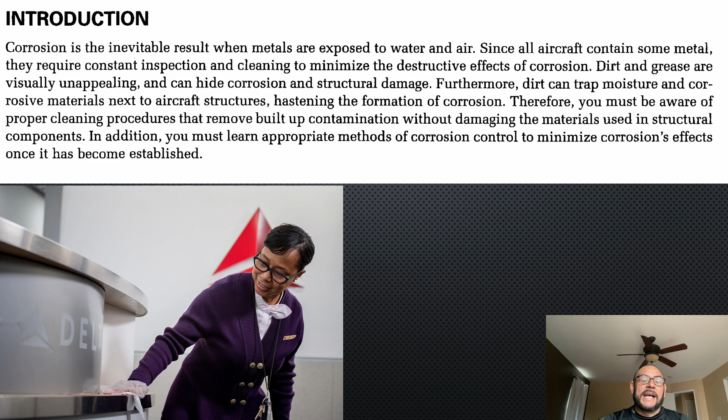Now, while a clean aircraft is more visually appealing than a dirty one, appearance is a secondary consideration in aircraft cleaning. That is all to say that we clean aircraft not to make them look beautiful, although customers like a clean, beautiful plane. But as AMPs, we clean them so we can visually inspect for corrosion or any destructive measures or stress fractures that the aircraft has endured or survived.

When we look at Appendix D of the FAR, Part 43 requires that the airframe and engine be cleaned before performing an annual or 100-hour inspection. In addition, common sense and good maintenance practice require that an aircraft be kept clean. Dirt can cover up cracks and damaged components, as well as trap moisture and solvents that lead to corrosion. If allowed to accumulate over time, dirt and debris can build up to a considerable weight and decrease the useful load of the aircraft. Therefore, the cleaning of the aircraft exterior and interior should not be taken lightly.

The materials and procedures presented in this section are intended as guidelines only. You should always follow the manufacturer's recommendation for cleaners, solvents, and cleaning procedures.

Now, when we talk about weight, that is one of the biggest enemies of flight, right? Because the more weight you are transporting or carrying, the harder the engines have to work. So when you have buildup of dirt and grease all over the aircraft, that starts adding pounds to the weight of the aircraft, which means that you will be able to carry less. And in aviation, that is precious.

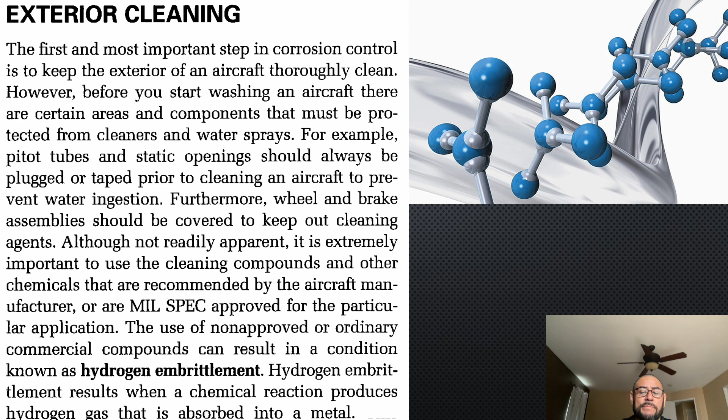Furthermore, wheel and brake assemblies should be covered to keep out cleaning agents. Although not readily apparent, it is extremely important that what is recommended by the aircraft manufacturer or the mil spec approved for a particular application be used. The use of non-approved or ordinary commercial compounds or chemicals can result in a condition known as hydrogen embrittlement. Hydrogen embrittlement results from chemical reactions that produce hydrogen gas that is absorbed into the metal, destroying the metal and its integrity.

Now also, the engine cowling and wheel well are usually full of grease and oil deposits that require special treatment and observation. So those are the areas where you need to really be careful, okay? Because as the landing gear goes up and down, there's hydraulic fluid, there's all kinds of stuff, there's debris, there's grass, there's dirt, there's all kinds of stuff being built up on the landing gear.

Typically, these areas must be soaked with a 1-to-2 mixture, that's the ratio of emulsion cleaner and water. After allowing the cleaner to remain on the surface for a few minutes, scrub the heavily soiled area with a soft bristle brush to completely loosen the dirt, and rinse it with a high-pressure stream of water.

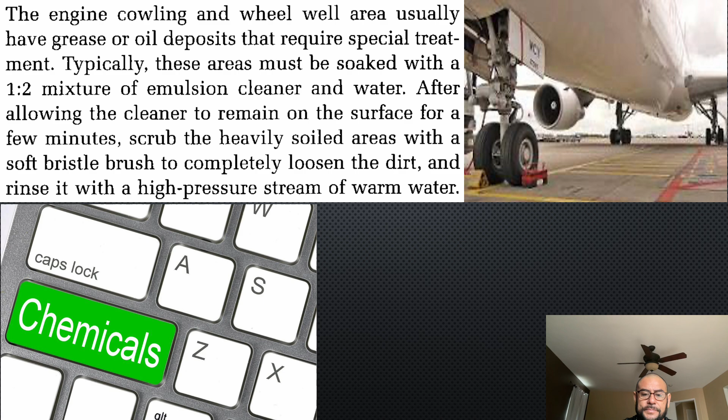Now, when we talk about the type of materials to be used in cleaning, it depends on the nature of the element that needs to be removed. For example, for removing grease, oil, or soft preservative compounds, dry cleaning solvents like naphtha are often used. The two most common types of naphtha are aliphatic naphtha and aromatic naphtha. Aliphatic naphtha is a hydrocarbon solvent that dissolves oil and grease but does not harm rubber or acrylic components.

That is huge, right? Because if you're applying chemicals that will destroy plastic or rubber, you might damage certain areas, certain lines, certain hydraulic fluid lines, right? The aromatic naphtha, on the other hand, attacks rubber or acrylic compounds or materials. Because it is safe on most materials, aliphatic naphtha is frequently used to wipe down clean surfaces before painting.

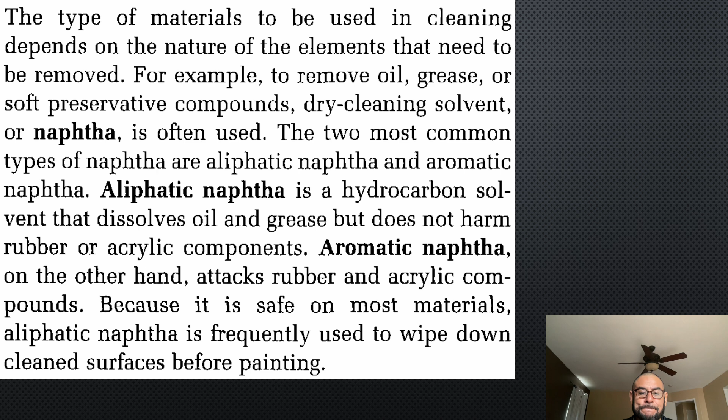Chemical cleaners must be used with great care in cleaning assembled aircraft. The danger of entrapping a potentially corrosive solvent in faying surfaces and crevices counteracts any advantages in their speed or effectiveness. For example, caustic cleaners can cause corrosion on aluminum or magnesium alloys and therefore should not be used. Magnesium engine parts should be washed with a commercial solvent and decarbonized, then scraped or grit blasted. Before they are painted, magnesium engine parts should be wiped down with a dichromate solution to improve paint adhesion.

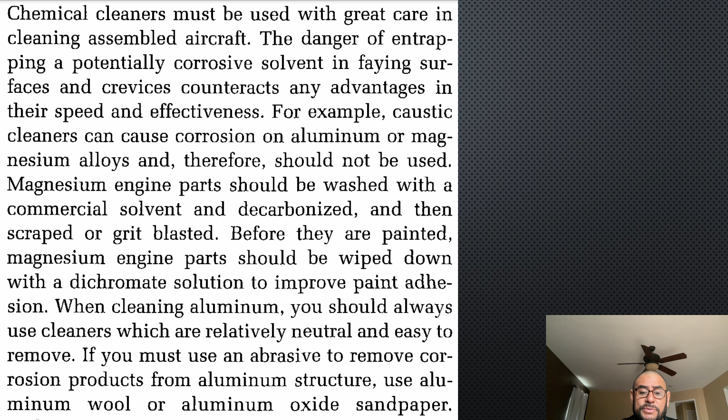When cleaning aluminum, you should always use cleaners which are relatively neutral and easy to remove. If you must use an abrasive to remove corrosive or corrosion products from aluminum structures, use aluminum wool or aluminum oxide sandpaper.

Now, let's look at using chemical cleaning agents. First and foremost, open all circuit breakers associated with battery power prior to application of flammable solvent, because you're going to be powering down the aircraft. If you can't get into a compartment because it's electrically operated, the door or compartment, then you won't be able to open it once you completely shut down the power or disconnect the battery.

Do not use synthetic wiping cloths with flammable agents. Wiping cloth made of natural materials such as cotton should be used. Be careful with alcohol. I've seen some mechanics even use jet fuel sometimes to wipe down certain difficult areas. Although jet fuel can really break down dirt and help expedite the cleaning process, it's also very flammable, so you don't want to use any type of avgas or jet fuel or fuel at all.

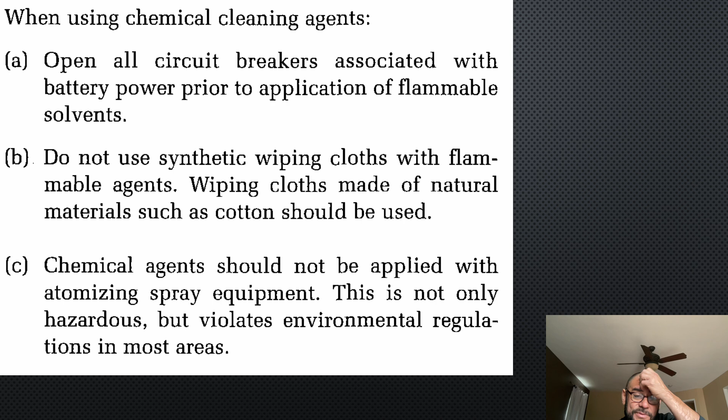Do not use synthetic wiping cloths. Chemical agents should not be applied with atomizing spray equipment. This is not only hazardous, but violates environmental regulations in most areas. Remember, as an A&P, you might be traveling to different countries, states, or parts of the world, where rules and standards might be different, so you have to be familiar with local policies, standards, and laws.

Keep all agents away from open flames, any live electrical circuits, or potential sources of electrical arcing. Very important. Also ensure that residual agents are removed from the aircraft, engine bays, and equipment. Do not mix any cleaning agent with any solvent. Do not use cleaning compounds at higher concentrations than recommended. Do not allow cleaning agents to dry on aircraft surfaces. You got to wipe them down quickly. Such practices can cause streaking and damage to aircraft finishes and components.

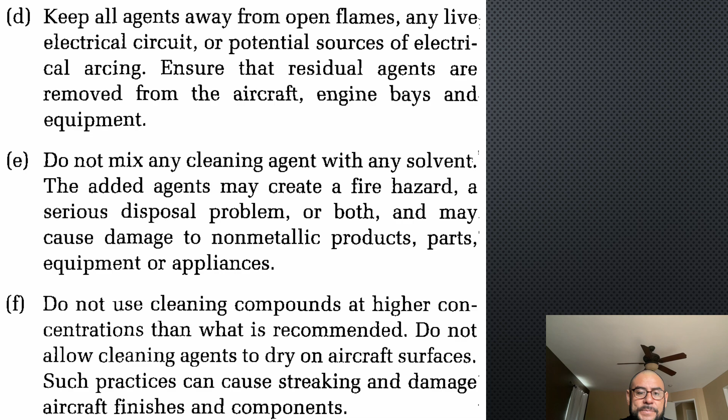To prevent entrapment of water and cleaning agents inside an aircraft part in structural areas, all drain holes, flap valves, etc. should be open before washing to ensure proper drainage occurs, and you're not holding water in certain areas, which can really create corrosion.

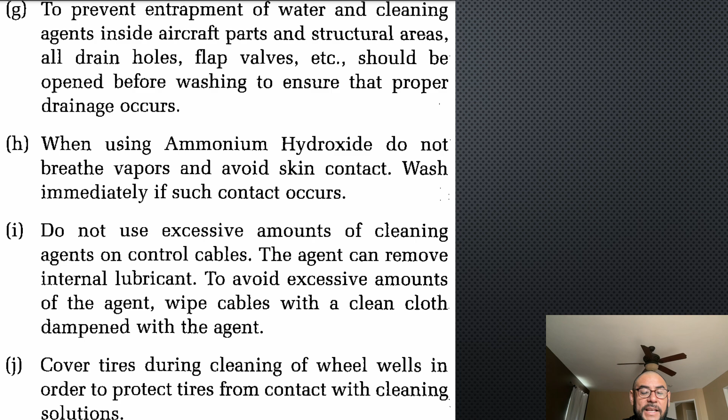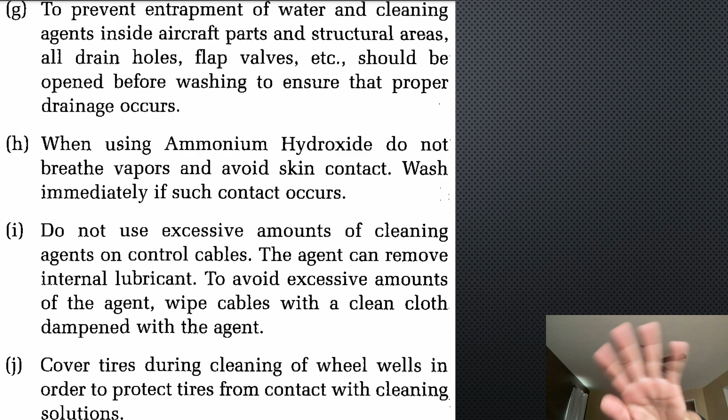When using ammonium hydroxide, do not breathe vapors, avoid skin contact, wash immediately if such contact occurs. Do not use excessive amounts of cleaning agents on control cables. The agents can remove internal lubricant. To avoid excessive amounts of agents, wipe cable with a clean cloth dampened with the agent. So you spray on the cloth and then you use the cloth. Do not spray directly onto the part and then wipe. Here's your clean cloth - you spray it on the cloth, then you get the cloth and wipe the part.

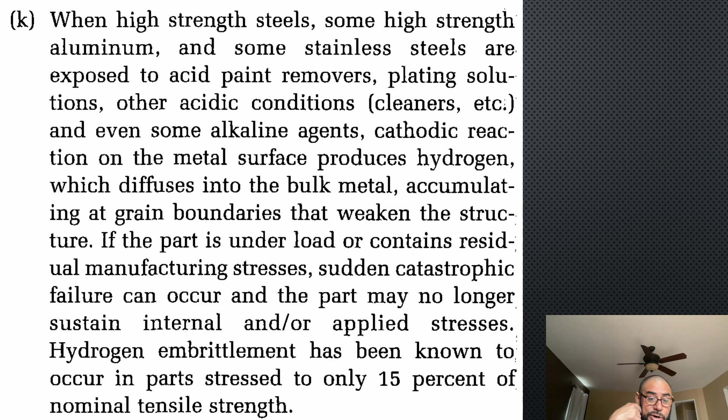Now, when high strength steels, some high strength aluminum, and some stainless steel are exposed to acid paint removers, plating solutions, or other acidic condition cleaners, or even some alkaline agents, some of this stuff can really damage the aircraft. You have to be able to read what the chemical agent is used for. If the part is under load or contains residual manufacturing stress, sudden catastrophic failure can occur and the part may no longer sustain internal and/or applied stresses. Hydrogen embrittlement has been known to occur in parts stressed to only 15% of the nominal tensile strength.

Now, when using high pressure water spray, you must exercise caution for those around you, especially around engine components. For example, if high pressure water is used to degrease an engine, you must avoid spraying electrical components such as the magnetos and wiring harnesses. Furthermore, high pressure water sprays can rinse the lubricant from bearings and grease fittings. Therefore, after washing wheel wells, flap tracks, and hinges, you should lubricate them to force out any water to prevent corrosion.

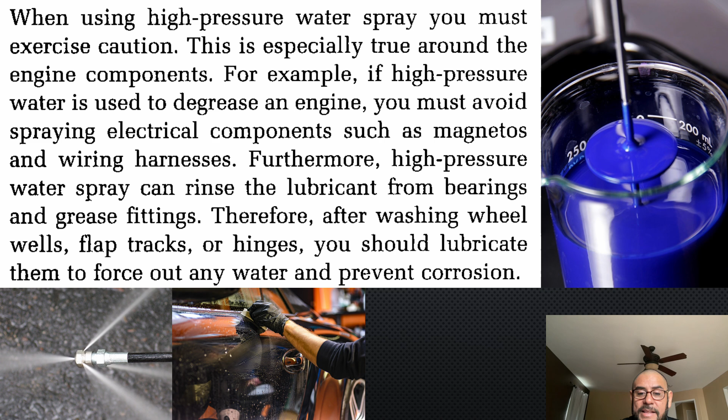Also, when you are using a high pressure spray, you might want to be careful with other aircraft around you, because that spray, especially if they're not inside the hangar, if there's a breeze, that water can travel to the next aircraft. So you have to be very careful.

Now, exterior finish maintenance. A clean, polished surface denies corrosion a place to start. Therefore, aircraft should be kept clean and waxed. All drain openings must be kept open, and deposits which have formed from engine exhaust must be removed before they build up excessively. Avoid damage to an aircraft by not using harmful cleaning, polishing, brightening, or paint removing materials.

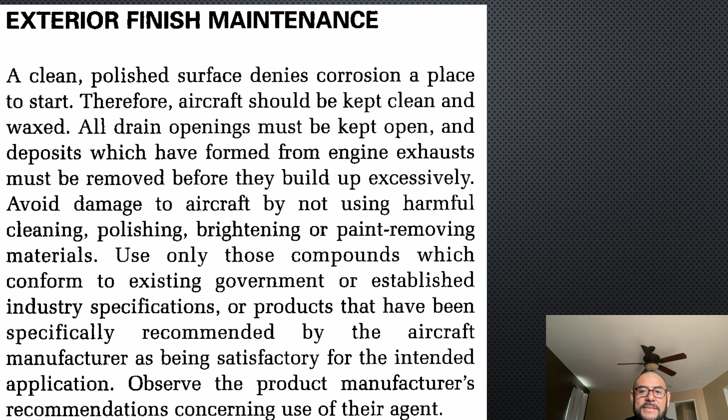Use only those compounds which conform to existing government or established industry specifications, or products that have been specially recommended for the aircraft or by the aircraft manufacturer as being satisfactory for the intent of the application. Observe the product manufacturer's recommendations concerning the use of their agents. Again, please read - you're a college student, please read.

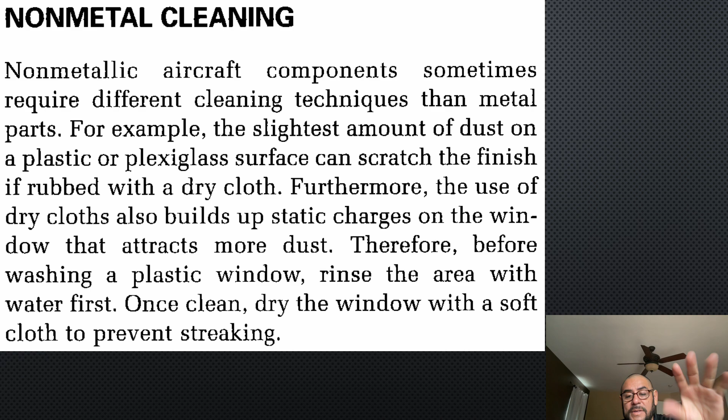Non-metallic aircraft components sometimes require different cleaning techniques than metal. For example, the slightest amount of dust on a plastic or plexiglass surface can scratch the finish if rubbed with a dry cloth. Furthermore, the use of dry cloths also builds up a static charge on the window that attracts more dust. Therefore, before washing a plastic window, rinse the area with water first. Once clean, dry the window with a soft cloth. So rinse it with water first, then clean it, then go with the dry cloth and remove everything, okay?

Oil and hydraulic fluid rapidly destroy the rubber in aircraft tires. Therefore, whenever these fluids are spilled on a tire, they should be immediately wiped off with a dry towel. The tires should be washed with soap and water. Because most cleaning solvents are petroleum based, soap and water are the only approved solutions for cleaning tires. Soap and water, okay, soap and water. That's your best friend right there.

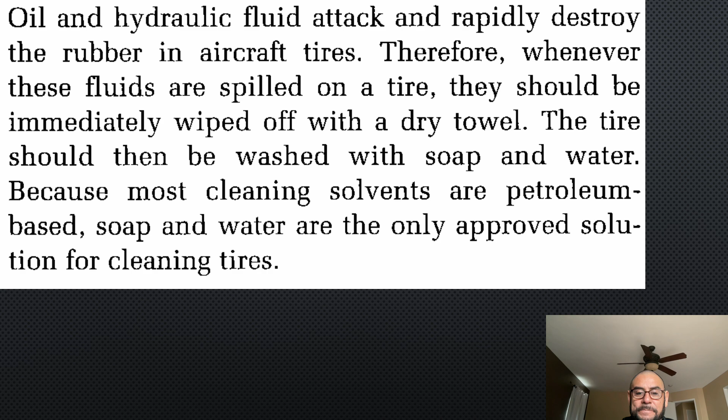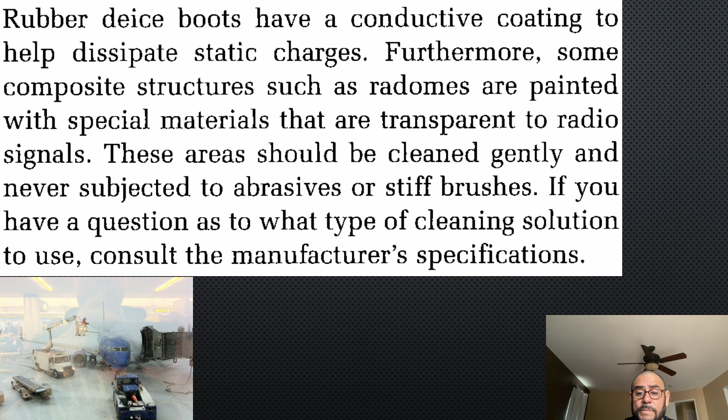Rubber deice boots have a conductive coating to help dissipate static charges. Some composite structures such as radomes are painted with special materials that are transparent to radio signals or waves. These areas should be cleaned gently and never subjected to abrasive or stiff brushes. If you have a question as to what type of cleaning solution to use, consult the manufacturer's specification. Always default or refer back to the manufacturer's specifications. They are the ones that will be able to provide you with the information that you need.

Power plant cleaning. Accumulated dirt on power plants can cover defects and lead to overheating. The dirt and debris can cover something that's damaged, and you will not be able to notice it if you simply do a visual inspection. For this type of inspection, you actually have to clean areas so you can see. Therefore, aircraft engines should be cleaned on a regular basis. However, when doing this, all electrical components in the engine compartment must be protected from solvent and or soaps, right? So solvents or soaps can really destroy electrical wiring, electrical harnesses, any electrical components. So be very mindful of that.

This includes wrapping the magnetos so no water can get in the vents. If the power plant is located over the landing gear, the gear's brake and tire assemblies should be covered in plastic as well. If you use a high pressure water spray, avoid spraying the starter, alternator, and air intakes with solvent or water rinse, because they will actually make their way into the power plant and destroy the internal components or integrity of the aircraft.

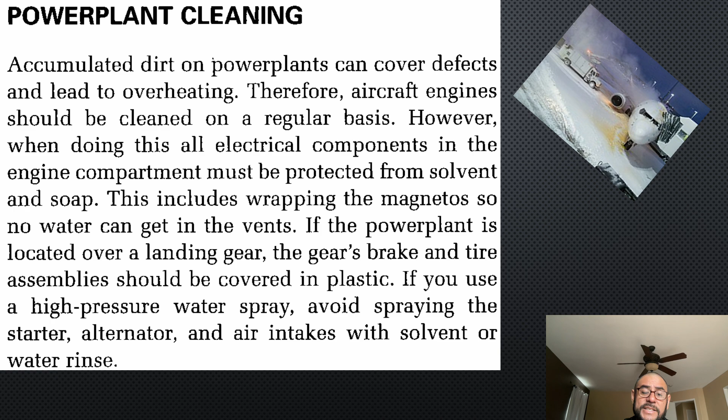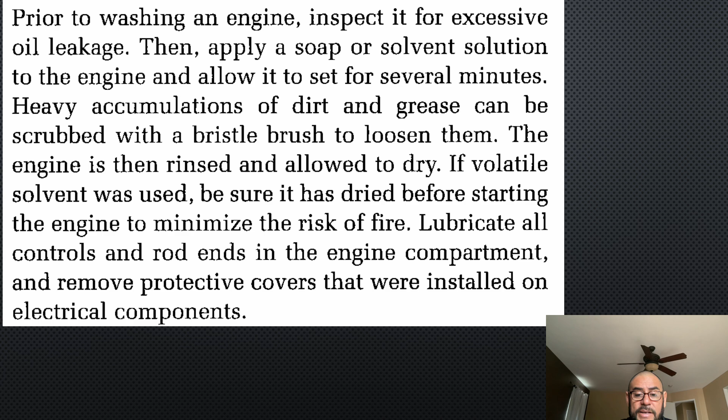Prior to washing an engine, inspect it for excessive oil leaks, right? That is going to happen. Then apply a soap or solvent solution to the engine and allow it to set for several minutes. Heavy accumulations of dirt and grease can be scrubbed with a bristle brush to loosen them. The engine is then rinsed and allowed to dry. If volatile solvent was used, be sure to give it enough time to dry before starting the engine to minimize the risk of fire, right? Remember, some of these chemicals are flammable. Lubricate all controls and rod ends in the engine compartment, and remove protective covers that are installed on electrical components.

Now, shifting gears, corrosion and its control are of primary importance to all A&Ps and aircraft owners. Corrosion weakens primary structural members, which must then be replaced or reinforced in order to sustain flight loads. Flight creates stress, structural stress. Such replacements or reinforcements are costly, so a lot of money goes into this. They are time consuming and result in unscheduled delays. Now, delays mean money, especially for the aircraft owner or the company.

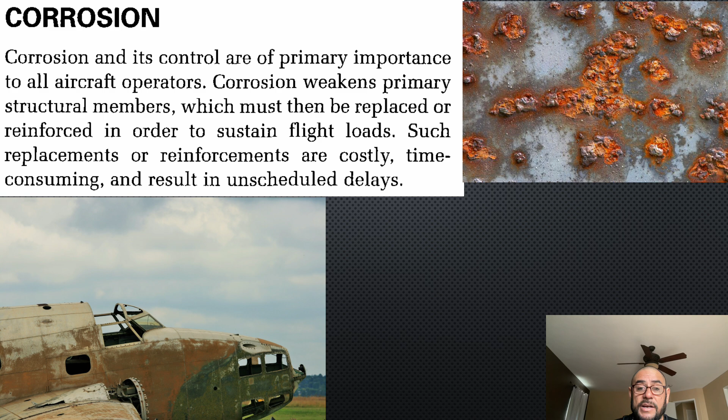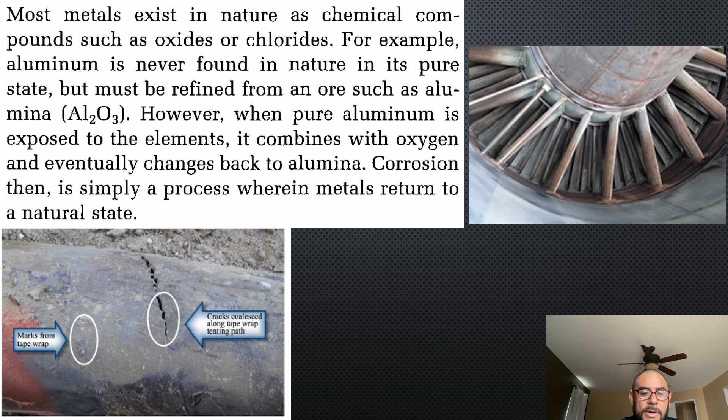Most metals exist in nature as chemical compounds such as oxides or chlorides. For example, aluminum is never found in nature in its pure state, but must be refined from an ore such as alumina. However, when pure aluminum is exposed to these elements, it combines with oxygen and eventually changes back into alumina. Corrosion then is simply a process wherein metals return to their natural state.

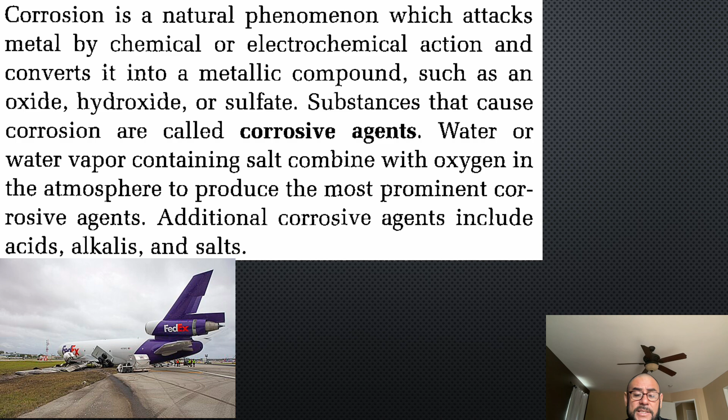Corrosion is a natural phenomenon which attacks metal by chemical or electrochemical action and converts it into metallic compounds such as an oxide, hydroxide, or sulfate. Substances that cause corrosion are called corrosive agents. Water or water vapor containing salt combined with oxygen in the atmosphere produce the most prominent corrosive agents. Additional corrosive agents include acids, alkalis, and salts. The appearance of corrosion varies with various metals. For example, on aluminum alloys and magnesium, it appears as surface pitting and etching, often combined with a gray or white powdery deposit.

However, on copper or copper alloys, corrosion forms as a greenish film. On steel, a reddish rust. When corrosion deposits are removed, the metal surface may appear etched or pitted depending upon the length and severity of the attack. If deep enough, these pits may become sites for cracks that can develop into bigger structural issues or problems.

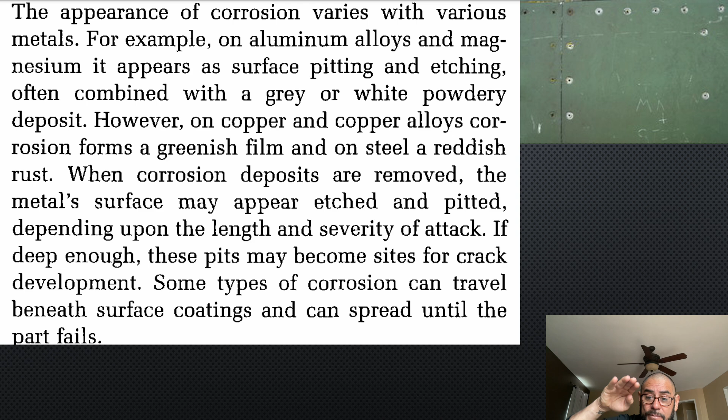Some types of corrosion can travel beneath surface coatings and spread until the part fails. Another way you can tell is by looking at the paint, because if there's corrosion under it, it will look slightly different than the rest of the undamaged area. There will be bumps, bubbles, pitting. That's how you identify corrosion under paint. And the paint might still look good.

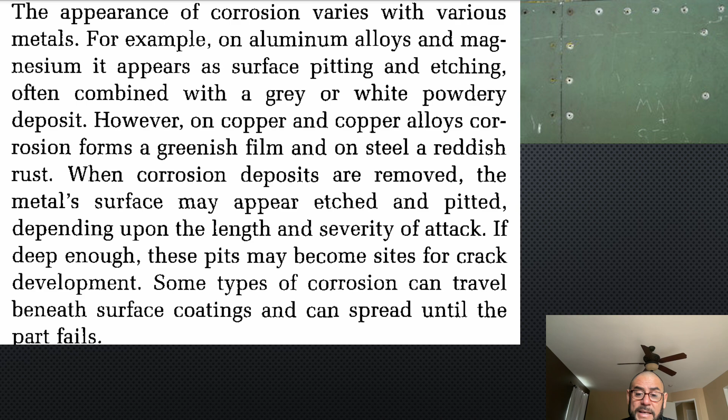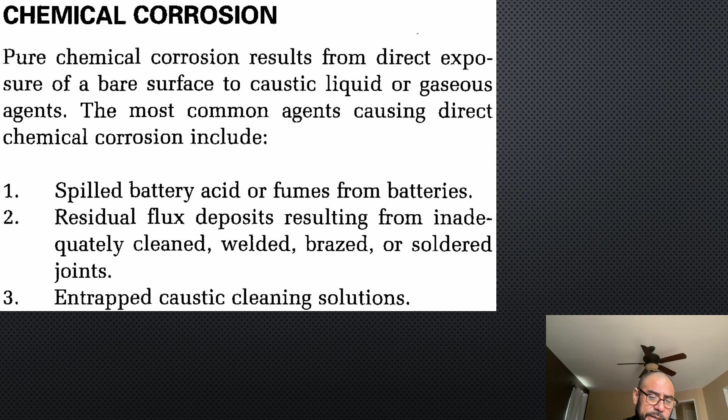Now, when we talk about chemical corrosion, pure chemical corrosion results from the direct exposure of a bare surface to caustic liquid or gaseous agents. The most common agents causing direct chemical corrosion include spilled battery acid or fumes from batteries, residual flux deposits resulting from inadequate cleaning of welded, brazed, or soldered joints, and trapped caustic cleaning solutions.

Electrochemical corrosion is similar to the electrolytic reaction that takes place in a dry cell battery. To understand how this happens, recall the structure of the atom that we talked about a couple of weeks ago. When the number of electrons matches the number of protons, the atom is said to be electrically balanced. However, if there are more or fewer electrons than protons, the atom is said to be charged and is called an ion. If there are more electrons than protons, it is a negative ion. But if there are more protons than electrons, it is a positive ion.

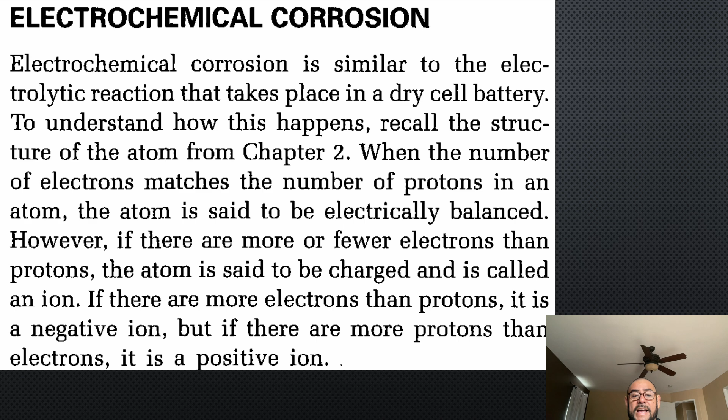So now let's talk about types of corrosion. Corrosion is a very general term and may appear in a variety of forms, depending on the metal involved and the corrosion-producing agent present. As an A&P technician, you must be familiar with the different types of corrosion as well as how to identify them. In this lecture, we'll review some of those.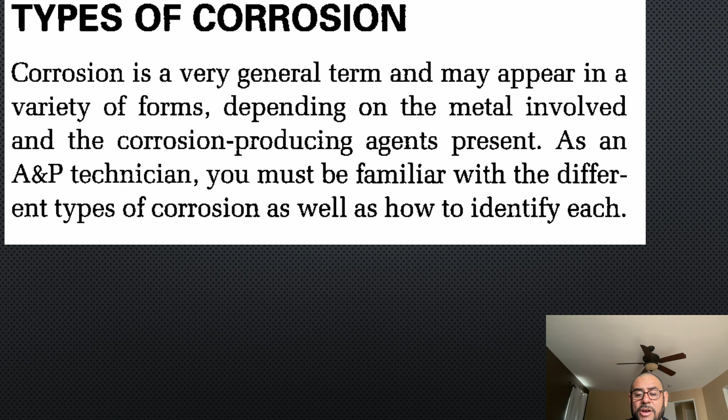Now, oxidation. One of the simpler forms of corrosion is dry corrosion, or as it's commonly known, oxidation. When a metal such as aluminum is exposed to a gas containing oxygen, a chemical reaction takes place on the surface between the metal and the gas. Two aluminum atoms join three oxygen atoms to form aluminum oxide. If the metal is iron or steel, two atoms of iron join three atoms of oxygen to form iron oxide, or rust.

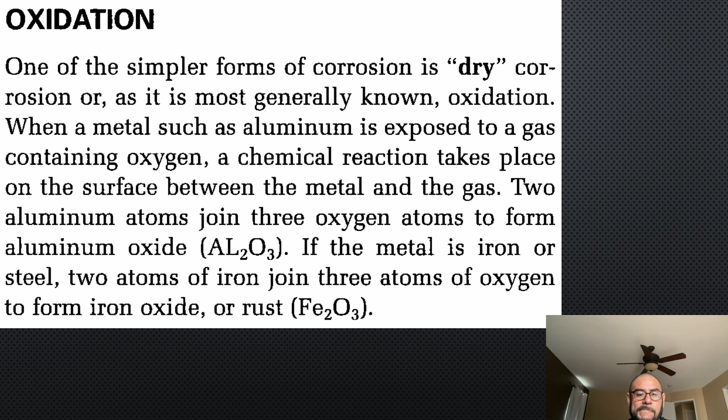There is one big difference between iron oxide and aluminum oxide. The film of aluminum oxide is unbroken, and therefore, once it has formed, further reaction with oxygen slows dramatically. Iron oxide, on the other hand, forms a porous, interrupted film. Since the film is not airtight, the metal continues to react with the oxygen in the air until the metal is completely eaten away. Now, down below, you can see the corrosion on this metal.

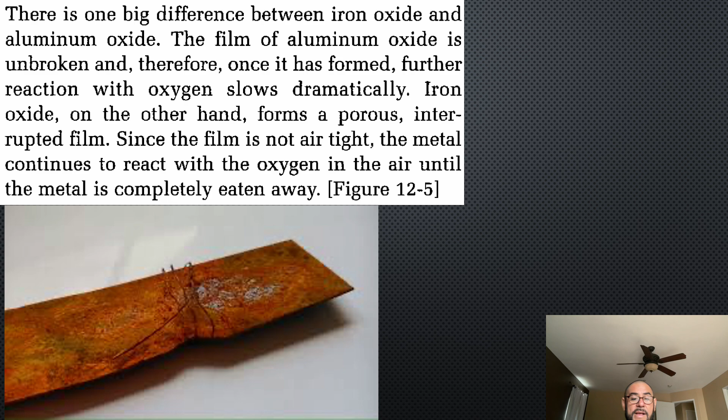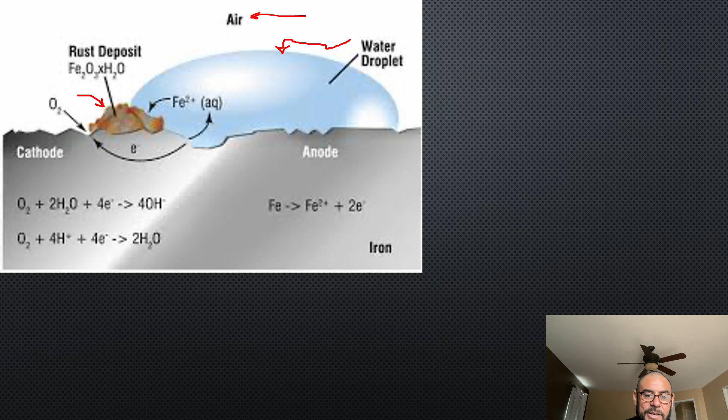Now, in this slide, we can see the water droplet here, right? Here we have the air component. Now, rust starts to develop here. Notice the color, right? And this here is the surface of the part. So air and water droplets combined start to build up this corrosion. I hope that makes sense. And this is with an iron material or surface.

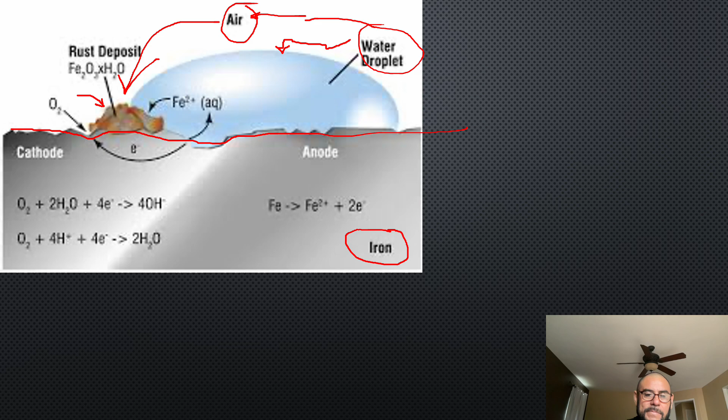Uniform surface corrosion. Where an area of unprotected metal is exposed to an atmosphere containing battery fumes, exhaust gases, or industrial contaminants, a uniform attack over the entire surface occurs. This dulling of the surface is caused by microscopic amounts of the metal being converted into corrosion salts. If these deposits are not removed and the surface protected against further action, the surface becomes so rough that corrosion pits form. Corrosion sometimes spreads under the surface and cannot be recognized by either roughening or powdery deposits.

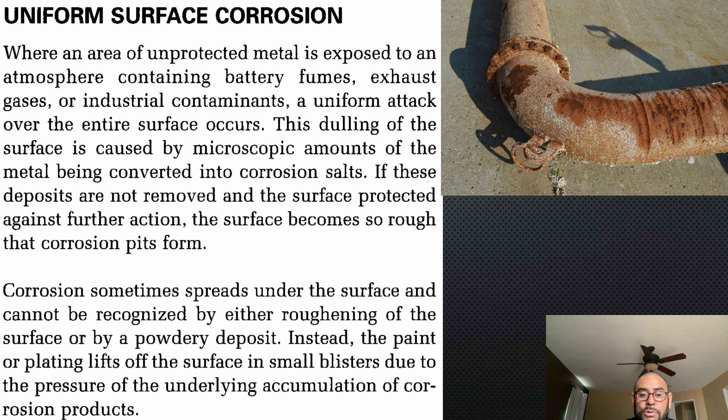Instead, the paint or plating lifts off the surface in small blisters due to the pressure of the underlying accumulation of corrosion products or materials. Now, remember I told you, paint can hide corrosion, but you can visually see it, and you can run your finger over it if in doubt, and you'll start feeling the bubbles. You can start feeling the rust under the paint. Some paint is so strong and durable that it'll hide the corrosion. So you have to be very careful.

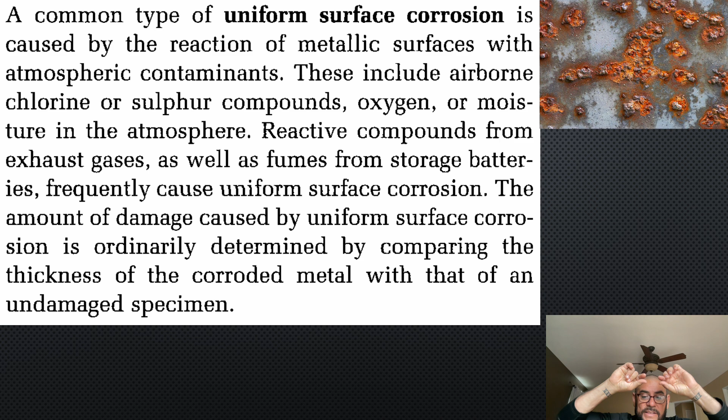A common type of uniform surface corrosion is caused by the reaction of the metallic surface with atmospheric contaminants. These include airborne chlorine or sulfur compounds, oxygen or moisture in the atmosphere, reactive compounds from exhaust gases, as well as fumes from storage batteries, which frequently cause uniform surface corrosion. The amount of damage caused by uniform surface corrosion is ordinarily determined by comparing the thickness of the corroded metal with that of an undamaged specimen. So you take them side by side and compare the thickness of the damaged metal and the undamaged metal, and then you'll be able to gauge how much damage is really there.

Now, pitting corrosion is likely a result of uniform surface corrosion left untreated. Pits form as localized anodic areas, and corrosive action continues until an appreciable percentage of the metal thickness is converted into salts. In extreme cases, these can eat completely through the metal. Pitting corrosion is usually detected by the appearance of clumps of white powder or powdery surface areas.

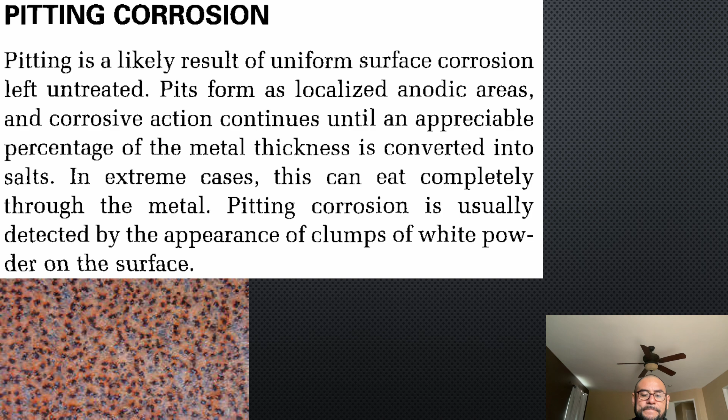Now, when we talk about galvanic corrosion, this is a very common type of corrosion which occurs anytime two dissimilar metals make electrical contact in the presence of the electrolyte. For example, galvanic corrosion can take place where dissimilar metal skins are riveted together, or where aluminum inspection plates are attached to the structure with steel screws.

This is a good example down here, right? So this is metal screws, and down here is the aluminum. And because they're making contact right here, all around, probably water touched the area. The water drops in here, makes its way in through the channels of the screw, all the way down, and starts spilling to the sides, and that's where we start developing that corrosion. Same on this side.

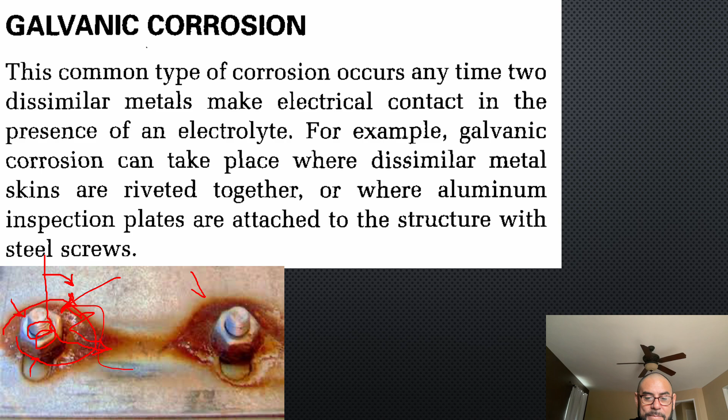Concentration cell corrosion, or crevice corrosion, is corrosion of a metal in a metal-to-metal joint. Corrosion at the edge of a joint even though the metals are identical, or corrosion of a spot on the metal's surface covered by foreign materials.

Now, if there is an area where water can accumulate, it will start creating more and more corrosion, and then it'll start elongating and creating more and more damage. If you continue to fly, this weak part will start to disintegrate. And when you land, let's just say you land in Seattle where it's super rainy, this just became a bigger hole. More water will start getting in there. And then they fly to another rainy area, and more, and so on. Through the years and through time, the corrosion will start really damaging the aircraft.

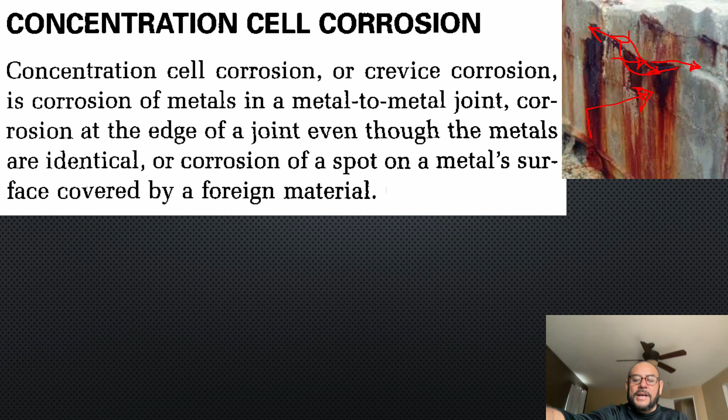Now, oxygen concentration cell corrosion. When water covers the surface of an aluminum aircraft skin and seeps into the cracks between lap joints, oxygen concentration cell corrosion can form. Since water in an open area readily absorbs oxygen from the air, it also attracts electrons from the metal to form negative hydroxide ions. The electrons required to form these negative ions come from the metal itself. The area between the skins does not give up electrons to the water on its surface because there is not enough oxygen there to have hydroxide ions. Instead, its electrons flow to the cathodic surface, the open area.

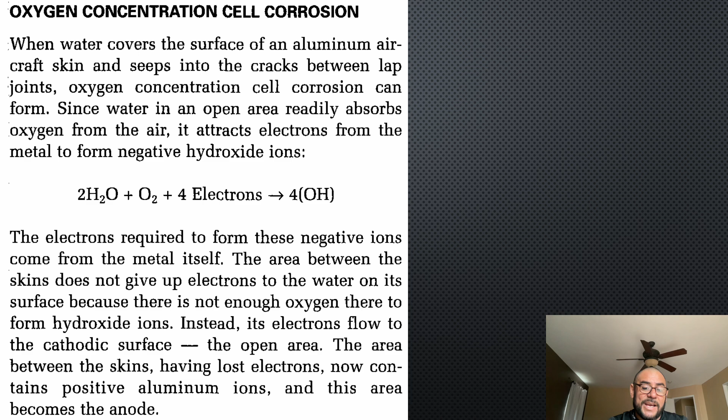The area between the skins, having lost electrons, now contains positive aluminum ions, and this area becomes an anode, which is corrosive. Metal ion concentration cells are very, very common in aviation.

You have to be very careful. You have to be aware. First, you got to know what you're looking for. Just like when students are asking me what's going to be on the exam, how about you read the syllabus, right? So when you're wondering what type of corrosion this is, instead of going all around the shop, do a little bit of research, especially in the beginning of your career. Do some legwork, and by doing research, you'll become more and more knowledgeable.

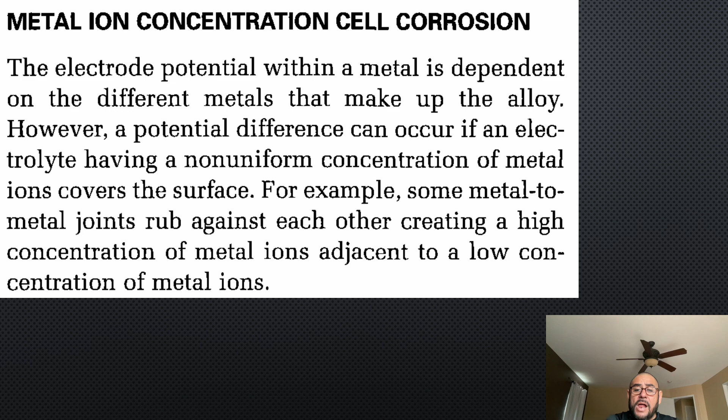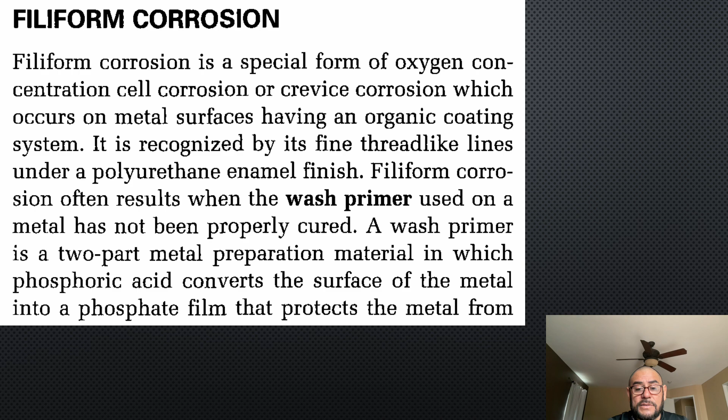Now, filiform corrosion is a special form of oxygen concentration cell corrosion, or crevice corrosion, which occurs on metal surfaces having an organic coating system. It is recognized by its fine, thread-like lines under polyurethane enamel finish. Filiform corrosion often results when the wash primer used on a metal has not been properly cured. A wash primer is a two-part metal preparation material in which phosphoric acid converts the surface of the metal into a phosphate film that protects the metal.

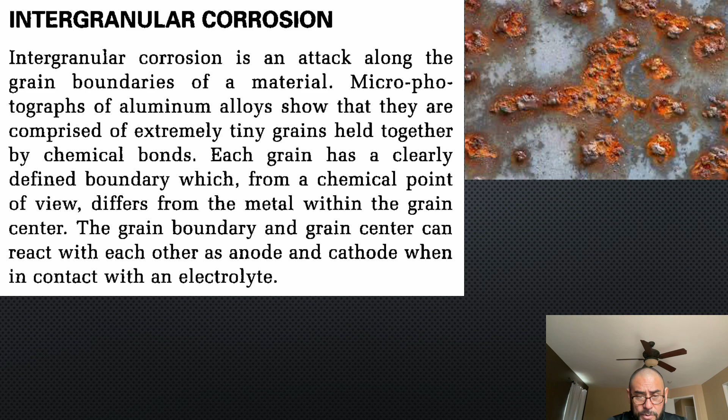Intergranular corrosion is an attack along the grain boundaries of a material. Micro photographs of the aluminum alloys show that they are comprised of extremely tiny grains held together by chemical bonds. Each grain has a clearly defined boundary which, from a chemical point of view, differs from the metal within the grain center. The grain boundary and grain center can react with each other as an anode and a cathode when it contacts with electrolyte.

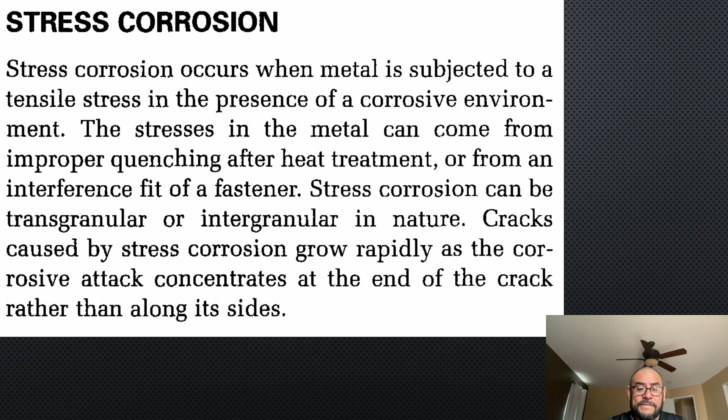Stress corrosion occurs when the metal is subjected to a tensile stress in the presence of corrosive environments. The stress in the metal can come from improper quenching after heat treatment or from the interference fit of a fastener. Stress corrosion can be transgranular or intergranular in nature. Cracks caused by stress corrosion grow rapidly as the corrosive attack concentrates at the end of the crack rather than along its side.

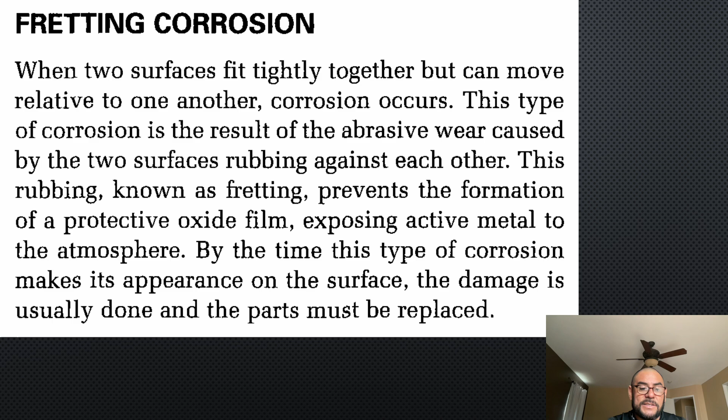Fretting corrosion occurs when two surfaces fit tightly together but can move relative to one another. This type of corrosion is the result of abrasive wear caused by the two surfaces rubbing against each other. This rubbing, known as fretting, prevents the formation of a protective oxide film, exposing the active metal to the atmosphere. By the time this type of corrosion makes its appearance on the surface, the damage is usually done and the parts must be replaced.

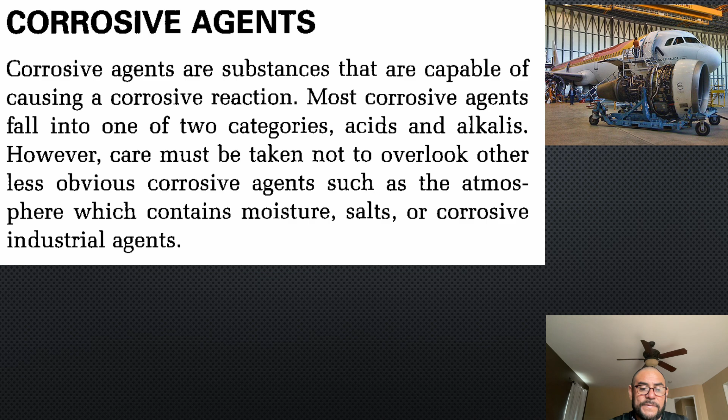Corrosive agents are substances that are capable of causing a corrosive reaction. Most corrosive agents fall into one of two categories: acids and alkalis. However, care must be taken not to overlook other less obvious corrosive agents such as the atmosphere, which contains moisture, salts, and corrosive industrial agents.

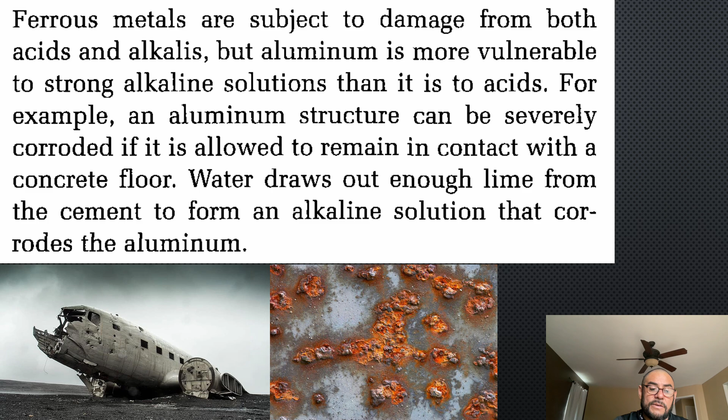Ferrous metals are subject to damage from both acids and alkalis, but aluminum is more vulnerable to strong alkaline solutions than it is to acids. For example, an aluminum structure can be severely corroded if it is allowed to remain in contact with a concrete floor. Water draws out enough lime from the cement to form an alkaline solution that corrodes the aluminum. So leaving parts on the ground is not a good idea.

Now we're going to shift gears a little bit. Mercury, although it is not commonly found in any quantity around aircraft, there is a definite possibility that mercury could be spilled in an aircraft. Hazardous cargoes are often carried in aircraft. Damage from a shifting load can result in a damaged container and hazardous spill. So it's transport, logistics, right? A lot of folks in this A&P program will be working for UPS or FedEx, which might fall into a division where you're transporting industrial chemicals or parts which might contain mercury.

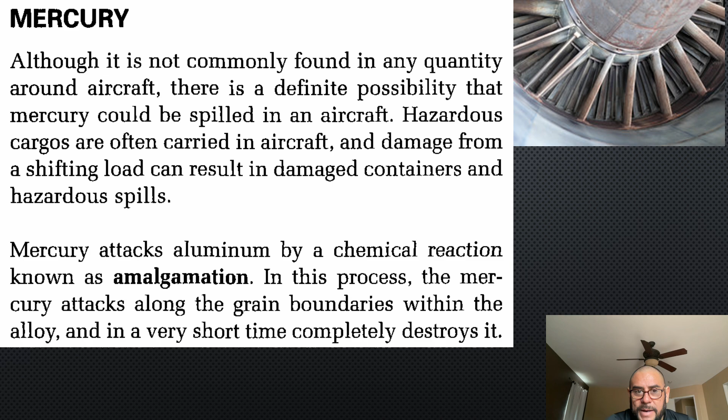Now, pure water reacts with metals to form corrosion or oxidation, but water holding a concentration of salts or other contaminants causes much more rapid corrosion. Seaplanes are in continual battle with the elements, and every precaution must be taken to stay ahead of corrosion formation. Some of you might end up in Alaska, right? In Alaska, there are a lot of seaplanes which can be operating in salt water, and those are especially vulnerable to attacks.

And when one is taken out of the salt water, it should be hosed down with large volumes of fresh water to get every trace of salt off the structure. Seaplane ramps are often located in areas where there is a concentration of industrial waste, making the water even more corrosive.

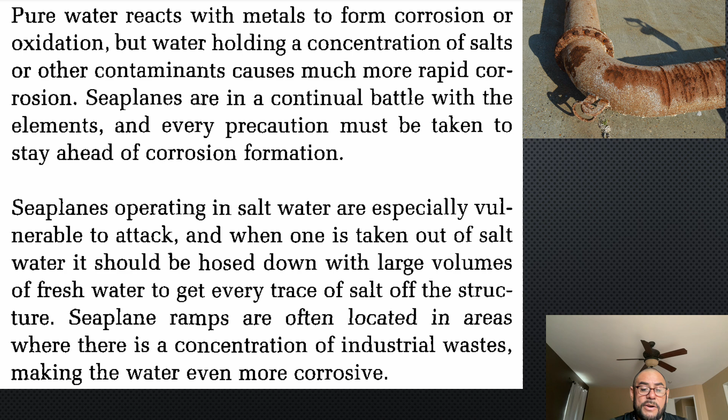Detection methods, right? So we got to be able to identify things. To aid in the detection of corrosion, you should use every inspection aid that is available to you. A good example would be the complex structure of modern aircraft makes the use of magnifying glasses, mirrors, borescope, fiber optics, and other optical inspection tools imperative for a good visual inspection.

Stress corrosion cracks are sometimes difficult, if not impossible, to detect by visual inspection alone. However, as discussed previously in some of our lectures, any fault that is open to the surface may be found through dye penetrant inspection. The main limitation of dye penetrant inspection is the fact that it can fail to find cracks that are so full of corrosion products that the dye cannot penetrate.

Also, penetrant cannot get into a crack that is filled with oil or grease. Porous or rough surfaces are almost impossible to clean of all penetrants, so materials with rough surfaces do not lend themselves to this type of inspection.

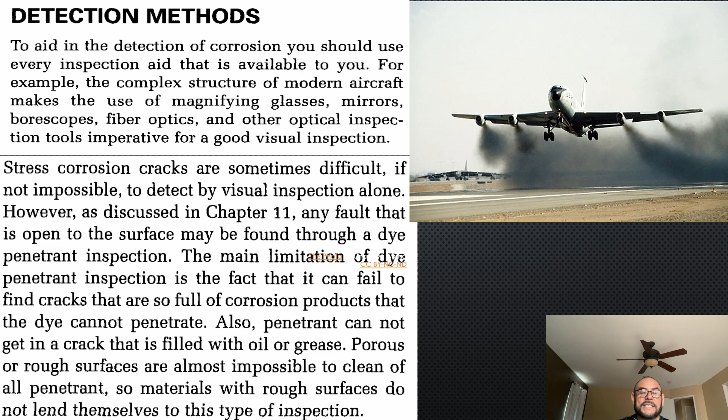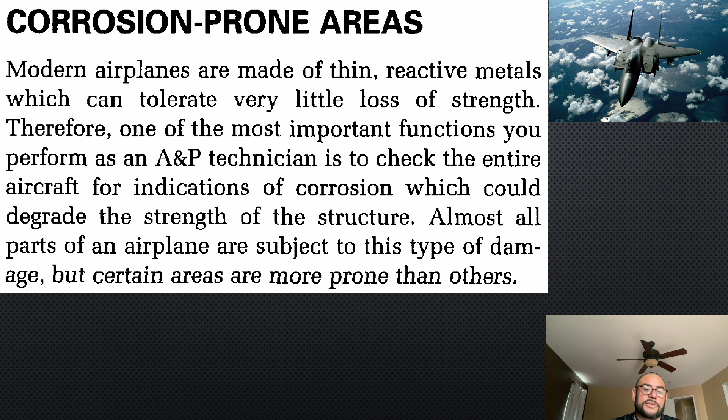Corrosion-prone areas. Modern airplanes or aircraft are made of thin, reactive metals that tolerate very little loss of strength. Therefore, one of the most important functions of an A&P is to check the entire aircraft for indications of corrosion which could damage or disintegrate the integrity or strength of the structure. Almost all parts of an airplane are subject to this type of damage, and you should be inspecting them, but certain areas are more prone than others.

Now, when we talk about the engine exhaust area, reciprocating engines or turbine engines generate power by converting chemical energy from hydrocarbon fuel into heat energy. Because of the inefficiency of the engine, much of the heat along with the energy-rich gases pass out through the exhaust. These gases contain all of the constituents for a potent electrolyte, and because of their relative elevated temperature, corrosion forms extremely rapidly.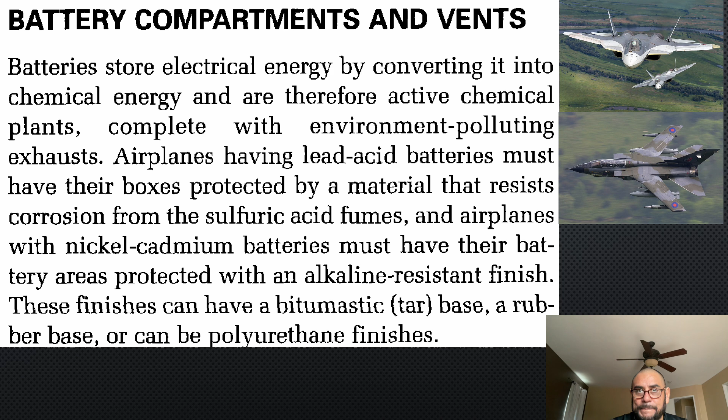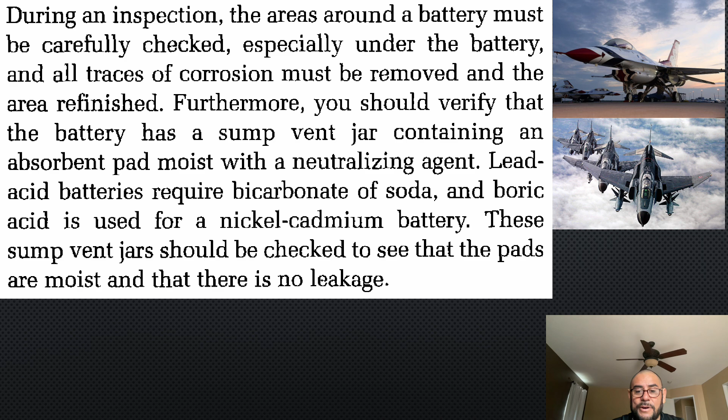During an inspection, you will be tasked with looking at and inspecting the areas around the batteries, which must be fully checked, especially under the battery. All traces of corrosion must be removed and the area refinished. You should verify that the battery has a sump vent jar containing an absorbent pad moist with a neutralizing agent. Lead acid batteries require bicarbonate of soda; boric acid can be used in nickel cadmium batteries. These sump vent jars should be checked all the time for their integrity to make sure there's no leakage.

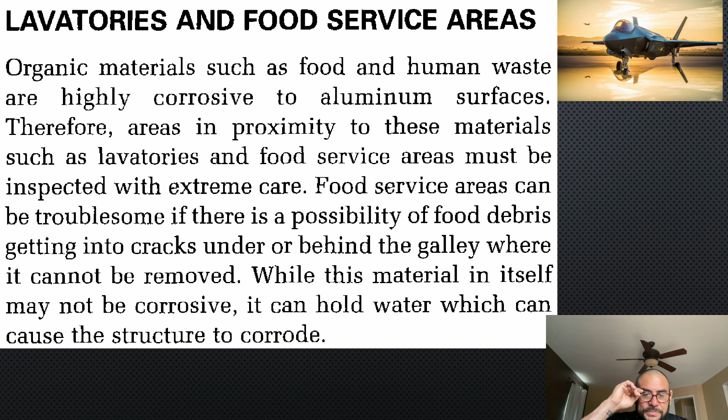The toilets and food services: organic materials such as food and human waste are highly corrosive to aluminum surfaces. Sooner or later you're going to know about blue juice, which is toilet water. Stay away from it. If you see blue juice, don't touch it. Areas in proximity to these materials, such as toilets and food service areas, must be inspected with extreme care and caution. Food service areas can be troublesome if there's a possibility of food debris getting into cracks under or behind the galley where it cannot be removed or seen by the naked eye. While this material itself may not be corrosive, it can hold water, which can trap air and moisture and produce corrosion.

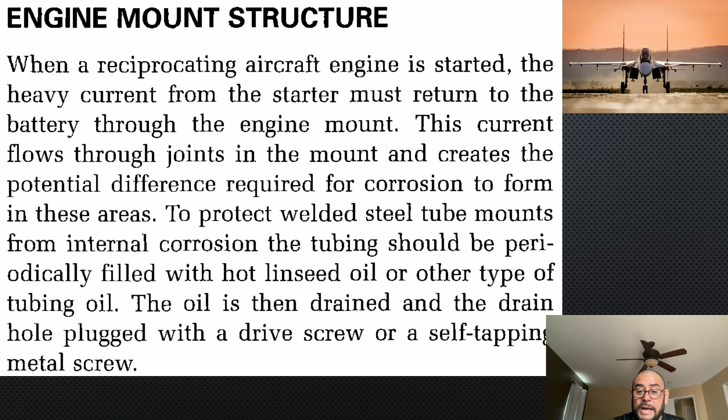Now, engine mounts. When a reciprocating aircraft engine is started, the heavy current from the starter must return to the battery through the engine mount. This current flows through the joints in the mount and creates the potential difference required for corrosion to form in these areas. To protect welded steel tube mounts from internal corrosion, the tubing should be periodically filled with hot linseed oil or other type of tubing oil. The oil is then drained and the drain hole plugged with a drive screw or self-tapping metal screw.

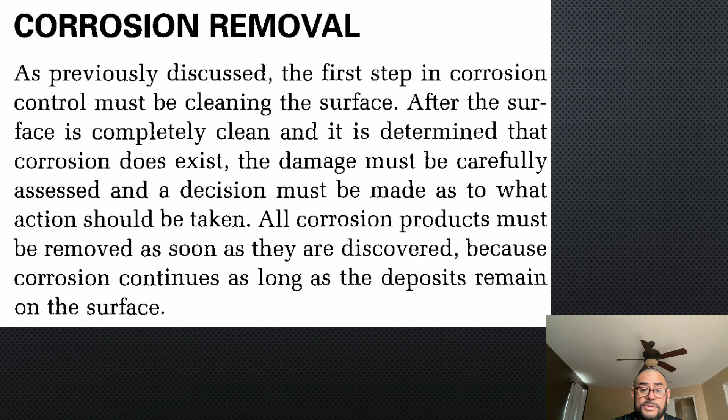Now, corrosion removal, the last part of this lecture. As previously discussed, the first step in corrosion control must be cleaning the surface, making sure it's super clean. After the surface is completely clean and it is determined that corrosion does exist, the damage must be carefully assessed and a decision made as to what action should be taken, also gauging the extent of the damage the corrosion created, if any at all. All corrosion products must be removed as soon as they are discovered or identified, because corrosion continues as long as the deposit remains on the surface.

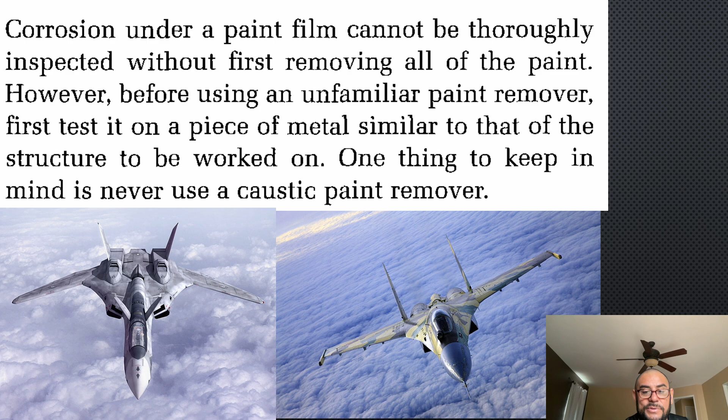Corrosion under a paint film cannot be thoroughly inspected without first removing all the paint. However, before using an unfamiliar paint remover, first test it on a piece of metal similar to that on the aircraft. One thing to keep in mind: never use caustic paint remover, like paint thinner. Be careful. Prior to applying a paint remover, all areas not to be stripped should be masked with heavy aluminum foil. This keeps the stripper from accidentally coming into contact with these areas.

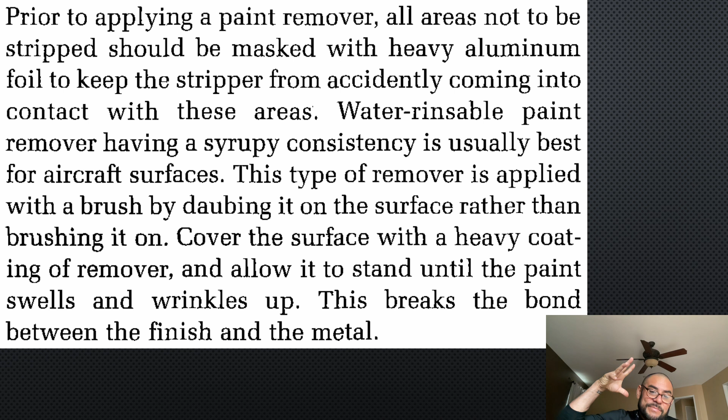There's a big roll of tape you'll see once you get to your duty station, it's like a foil tape, you can use that. However, that thing is super expensive, be mindful of that, because if your boss sees you using it without caution or regard to the cost, they're going to address that issue. I think that roll of tape is like $400 for the little roll. So be careful, don't be that guy using it for their own personal reasons. I've seen guys take some of those rolls of tape home. One guy had a party and invited pretty much all the crew from our hangar, and when we were in his garage, my boss saw rolls and rolls of tape that he had brought home, and that person got fired. So don't be that guy.

Water rinsable paint remover having a syrupy consistency is usually best for aircraft surfaces. This type of remover is applied with a brush by gently dabbing onto the area you really want to inspect. This breaks the bond between the finish and the metal, and it'll reveal itself so you can inspect the area.

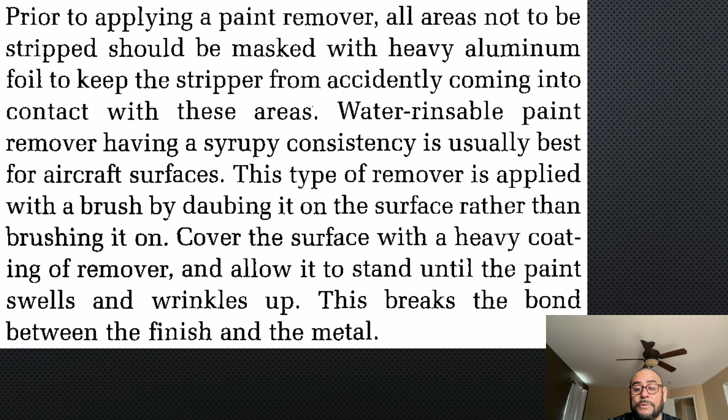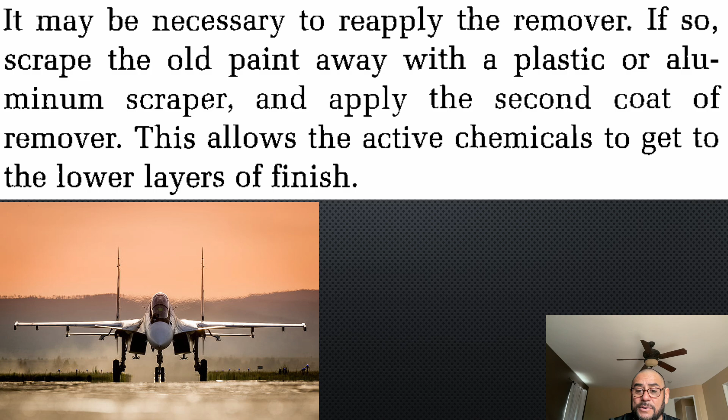It also might be necessary to reapply the remover. If so, scrape the old paint away with a plastic or aluminum scraper and apply a second coat of remover. This allows the active chemicals to get to the lower layers of the finish.

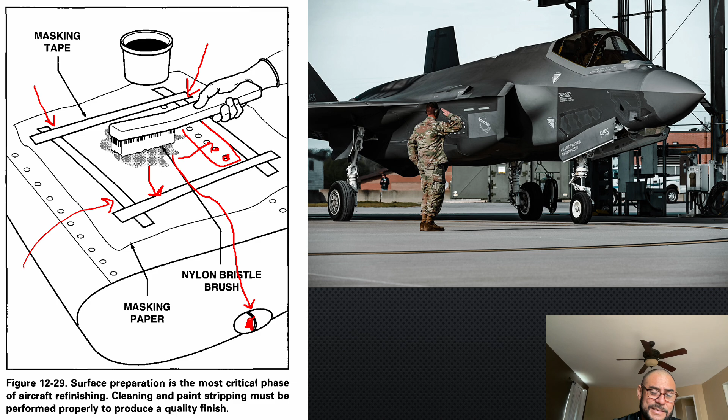I think these are rivet holes. I hope these are rivets. But if these are holes, I would also run foil tape here. If they are rivets indeed, then you don't really have to worry about that. But the solvent can make its way here if these are actual holes that are not plugged. So be mindful. What can happen is if you don't use this tape, some of this solvent can spill over and go right off the side of the tip of the wing, land here, and eat the plastic from this light, and make its way in there where there are electrical components. So, get my drift? I hope you do.

Treatment of aluminum alloys: in general, corrosion of aluminum alloys can be more effectively treated on the aircraft than corrosion occurring on other structural materials. Treatment includes the mechanical removal of as much of the corrosion as practical, the neutralization of residual materials by chemical means, and finally the restoration of the permanent surface coating.

Now we're coming to the end of this week's lecture, and I have two more slides, I think. But I want you to know that I encourage you to go through this and supplement it with your own reading of this area and section. So the lecture is a supplement to your reading.

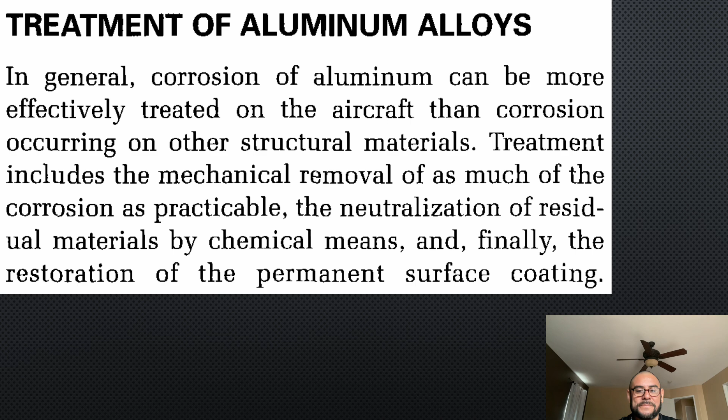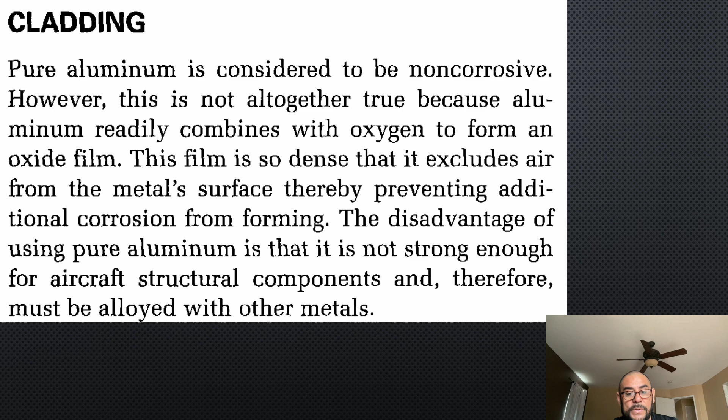Second to last slide. Pure aluminum is considered to be non-corrosive. However, this is not altogether true because aluminum readily combines with oxygen to form an oxide film. This film is so dense that it excludes air from the metal surface, thereby preventing additional corrosion from forming. The disadvantage of using pure aluminum is that it is not strong enough for aircraft structural components, so it must be alloyed with other metals.

Sealers and sealants: the higher speeds of modern aircraft have brought requirements for aerodynamic sealers used to fair the edge of wing skins. Airplanes flying at high altitudes require pressurized cabins, and as a consequence, every place that plumbing or electrical wiring passes through a bulkhead must be sealed with some form of plastic sealer. Integral fuel tanks are actually part of the wing structure, and every rivet joint must be sealed to prevent fuel leakage. A lot of aircraft you'll work with have fuel tanks that are actually the wings, so if you don't properly seal the wing, you might have a fuel leak, which is very dangerous.